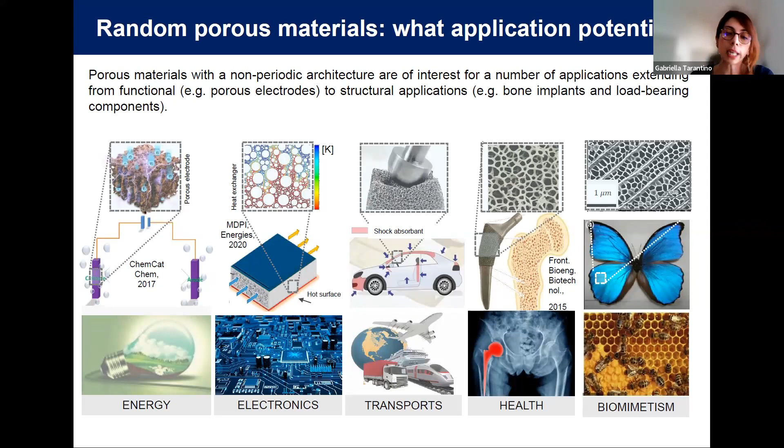First of all, what is it that makes a random material, porous material, a bit special? They contain non-periodic architecture, of course, and they can be used in many different applications, which span from functional applications like energy electrodes to biomimetism, without considering the main structural or load-bearing applications for this material, from transport to health.

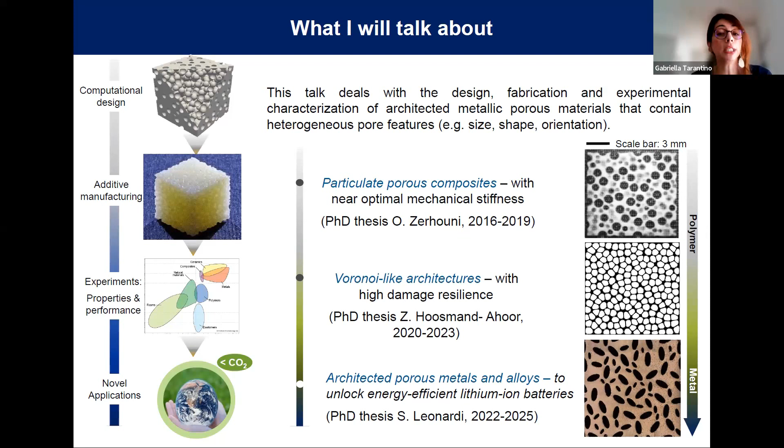Now this talk will deal in particular with the current chapter of this research axis, which we started several years ago, and which is about different types of random metamaterials, which span from polymer-based to metallic-based metamaterials, which is the current objective of this talk.

Now, let me first tell you how we make them and why they are interesting from the point of view of science. I'm just taking an example of comparison of random metamaterials with periodic metamaterials, which are widely used and known, in particular the octet truss lattices. And I'm going to show just a few results of our early work on this subject.

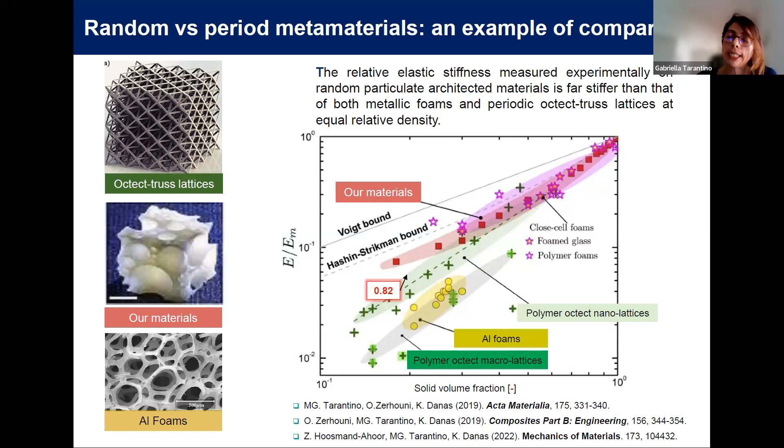In particular, we can see that the design of this material lies on a very solid theoretical base, and in particular this material, which contains a particular type of porous inclusion, can be considered like the first experimental realization of the well-known composite sphere assemblage model. And by this nature, they can be seen to have relative elastic stiffness which is by far stiffer than conventional metallic foams produced by standard metallurgical processes, and they can rival also periodic octet truss lattices. But this is just one example of comparison which we have bumped into.

Now, the tricky part of the random metamaterial is how to design them numerically. Because like all metamaterials, they first have to be designed, and then their STL model is generally given to the 3D printing for fabrication. We use a random sequential absorption algorithm, which is a very versatile algorithm, and which we have developed over the years.

Basically, its working principle is pretty straightforward. It consists in placing random inclusions in an arbitrary manner, so they are heterogeneously dispersed in a solid volume. The advantage of this method is that we can control the particle shape, the particle size, and eventually the orientation. So basically, we can have a very large palette of microstructures, which span from isotropic to anisotropic.

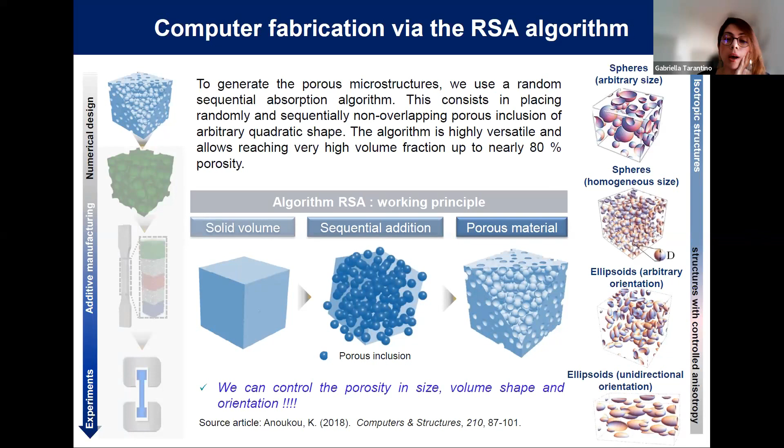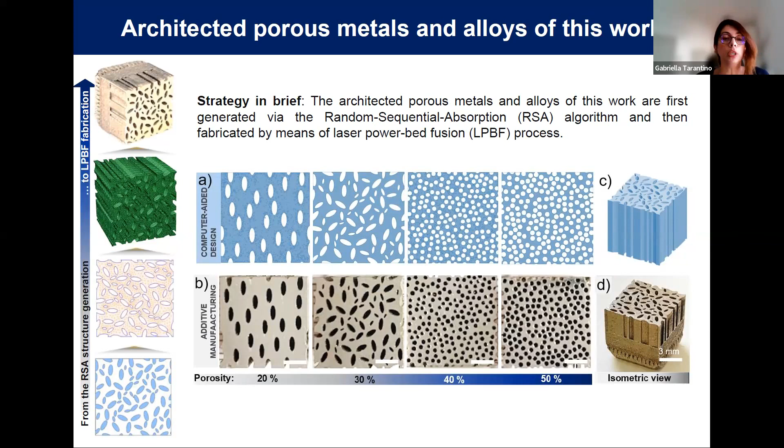Now, I presented the general algorithm for the 3D version of this metamaterial, but when it comes to metallic 3D printing, our material contains closed pores. And that's essentially a challenge when we go to laser powder bed fusion fabrication. So essentially, the talk will be about the 2D version of this material, which allows fabrication by metallic additive manufacturing. Our materials contain pores which are through-thickness and are essentially designed with the same algorithm in the 2D version.

Now, when it comes to metallic 3D printing, and that I can say by experience, unlike polymer 3D printing, we have a wealth of process parameters which we must take into account. The former parameters are the conventional parameters which we all know in laser powder bed fusion additive manufacturing, basically how we construct the volume. But the peculiarity of this material is that it contains particles which are embedded into the matrix. And as you can see from the sketch here, the majority of the volume of this part is built using the contour parameters.

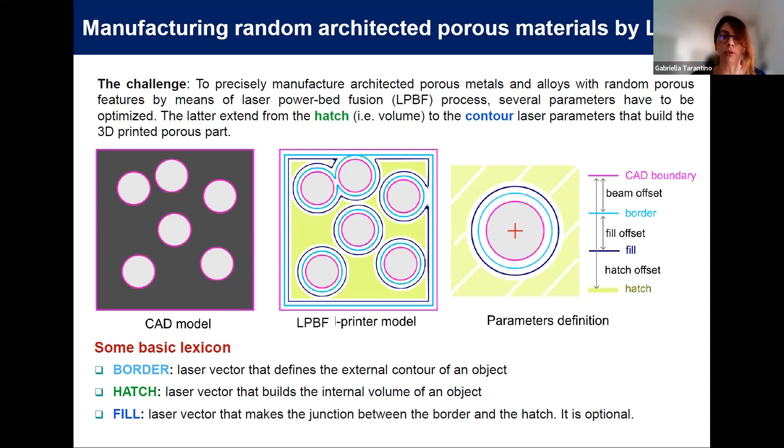A basic lexicon before I walk you into the results of this work is that we have to consider parameters which imply, for example, other vector definitions, like the border, and how we make the junction between the volume and the border. You can see from this basic sketch that the impact of this parameter is actually pretty huge. And to be honest with you, we were not aware of how much these parameters are really relevant in the proper fabrication of this microstructure.

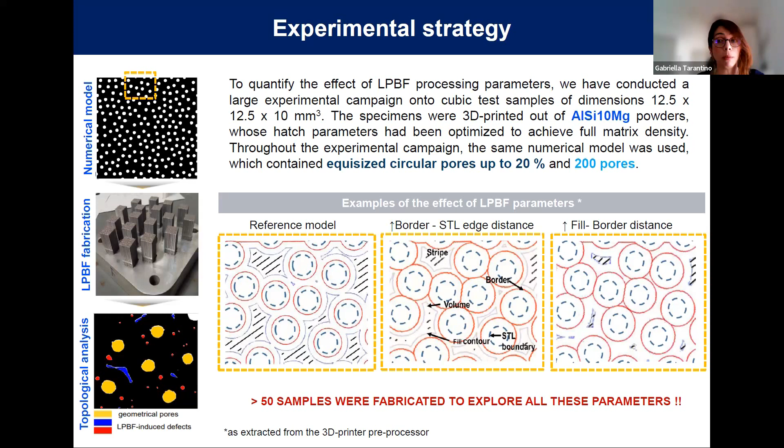So when we change the distance, the contour parameter, the actual result on the 3D printed part is pretty different. And to optimize these parameters and analyze them via topological analysis, we ran a large experimental campaign taking one single numerical model which features on average 20% pores and contains about 200 pores, and we scanned all the possible combinations of the parameters. Now, to make a long story short, I'm going to just go to the main result of the experimental campaign before presenting a summary of the results.

Now, taking the same numerical model, if we just change what we call the beam offset, basically the distance between the contour parameter and the STL outer edge, we can see that the same numerical model can be printed with huge differences. And we quantify those differences via image post-processing.

We can see, first of all, that mono-size pores cannot be printed. Essentially, the microstructure contains pores which are polydispersed in size. They resemble a perfect circle, but in reality they have an elliptical shape, with the aspect ratio diminishing with increasing this parameter, the beam offset, but they remain of pretty good round shape.

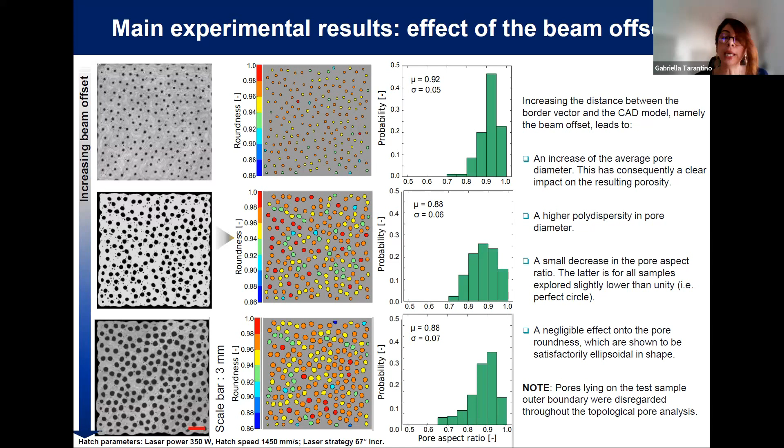Now, the visual result is clear. Of course, it has a strong impact on the porosity, final porosity, which can appear to be very different from the target porosity. And then we quantify, as I said, a campaign where we vary many other parameters like the fill and also the order by which the structures are 3D printed.

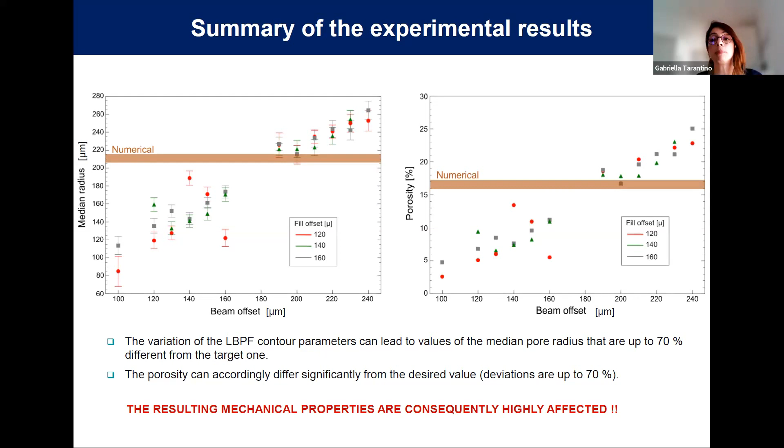We can see that porosity can vary by up to 70%. And that, of course, makes us think that there is a huge impact of this process parameter on the resulting mechanical properties, which we try to quantify next. What I'm going to present there is just a summary of the results, where we estimated the elastic stiffness. A part of our work currently also concerns the elastoplastic damage of this material.

Now, to measure these 3D printed models, we used standard compression testing, and basically since our post-treatment has revealed that the material also contains a negligible percentage of defects, we carried out a uniaxial quasi-static compression test with several steps of loading and unloading cycles, and we estimated the measured elastic property from the unloading step.

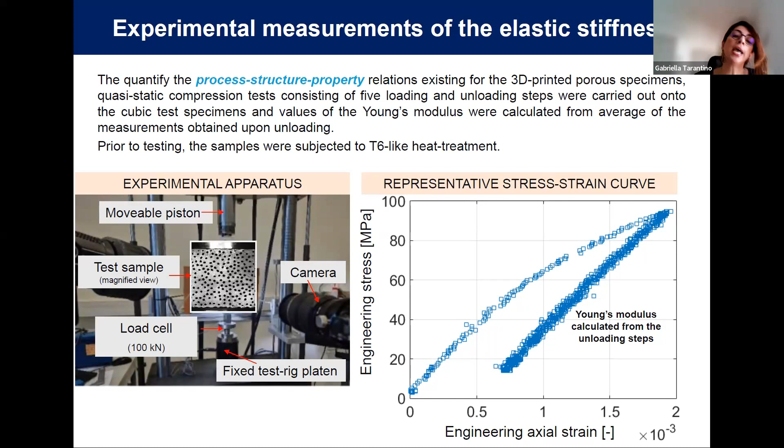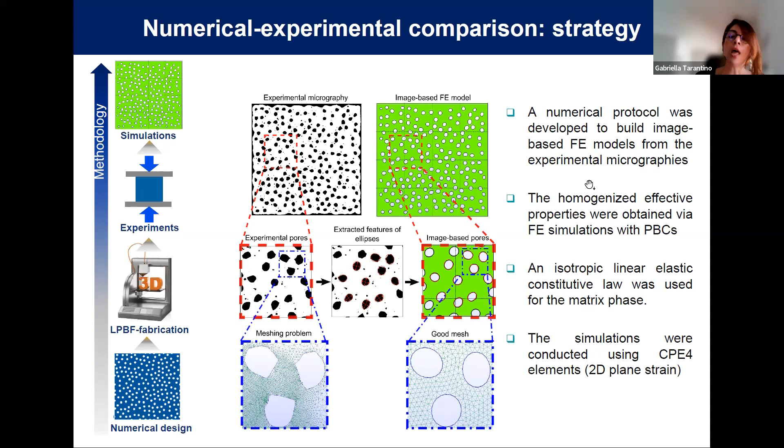That's pretty standard, but in order to follow our strategy, which goes from the design to the fabrication and to the experiment, we needed a stable predictive model for this material. And for this reason, we developed an image-based finite element protocol, which allows us to transfer the experimental micrography into an image-based finite element model. I'm going to spare you the details of this process, but the reason for that is that we have seen that the numerical model is not by any means exhaustive or representative of the real microstructure.

And so, as a summary, before jumping to the conclusion, we could see that the comparison between the experiment and the simulation, which we carried out in linear elasticity and using periodic boundary conditions, is pretty good. And one striking feature of this material, that this material still preserves from the 2D, is that they approach the Hashin-Shtrikman bound, which is known to be the tightest possible bound for isotropic porous media.

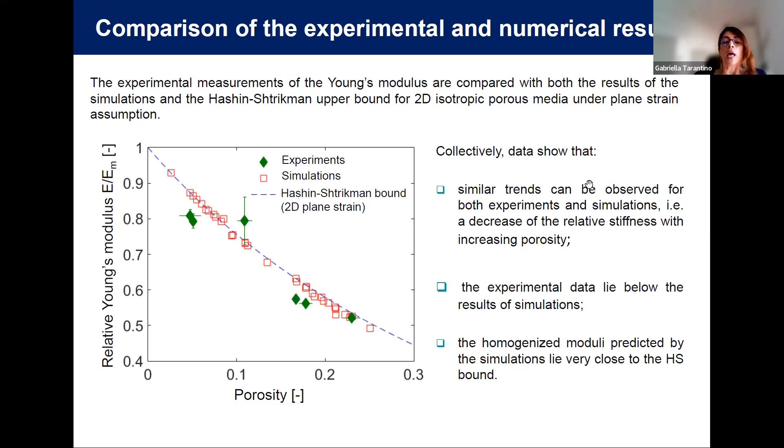In the end, I want to summarize the main result of this work. So essentially, we transferred the method we have developed for the generation of random porous material to metallic cellular materials produced by laser powder bed fusion additive manufacturing. We have seen that the manufacturing of complex porous architecture is tricky with this process, and we have to account for a breadth of parameters which is generally neglected in other simpler microstructures. And finally, the comparison between the experiment and the simulation is pretty satisfactory.

I want to just open a perspective, which is where we are going next, and why we spent such time in optimizing the way these materials are fabricated. Because engineering the porous architecture is pretty demanding for applications where we need the precise design of the pore features. Our major target application is to switch to functional applications like electrode architecture for high capacity electrochemical energy storage devices.